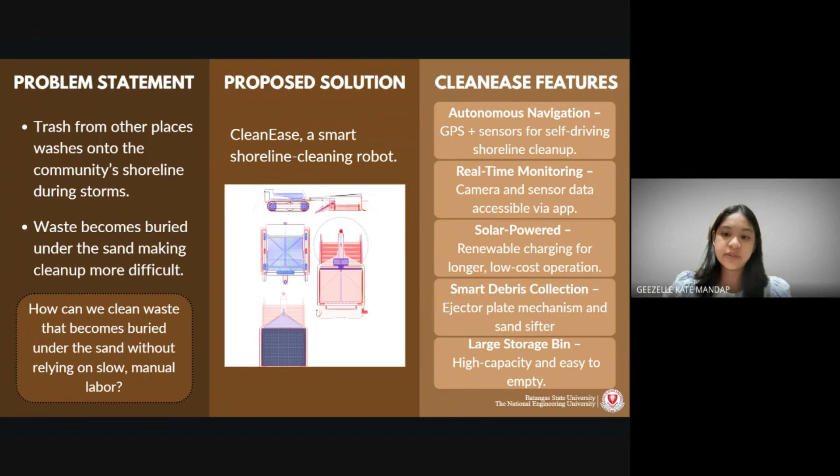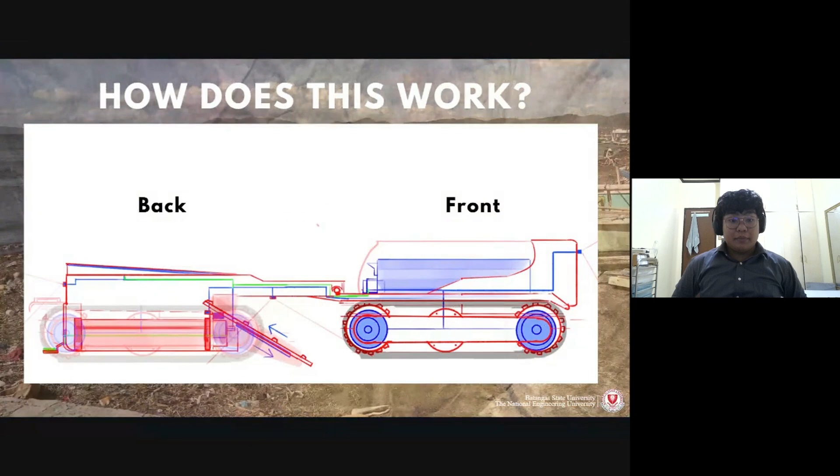Let us walk you through how our robot actually works with our low fidelity prototype. So first, imagine the robot moving along the shoreline with its tracks, similar to the ones found in construction vehicles. As it drives forward, its sensors and cameras continuously scan the sand to detect visible trash and even some partially buried waste on the surface. Once the robot identifies debris, it will automatically position itself so the angled sieve can scoop it up.

Now here's where the mechanism gets interesting. Equipped with an angled sieve behind it, the robot scoops up debris and repeatedly shakes it in a sifting motion, allowing sand to fall through while retaining the larger materials. The trash stays inside and is directed towards the waste hopper at the back, where everything the robot collects is stored. Inside the hopper, an actuator with an ejector plate is installed. This plate remains flush against the front wall of the waste hopper while the robot is still collecting.

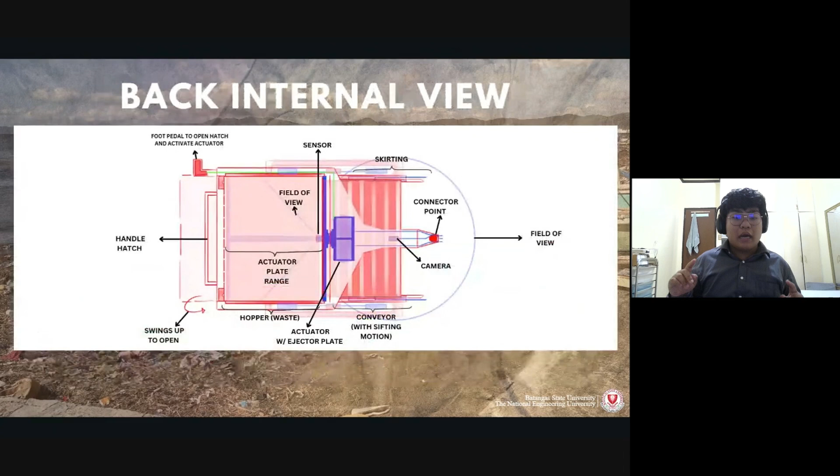Although the trash collection process is automated, the robot still requires an operator. When the hopper is full, a signal alerts the operator. The rear wall lifts, and the actuator, which is activated by a foot pedal located behind the robot, pushes the ejector plate forward, clearing all of the trash without manual scooping.

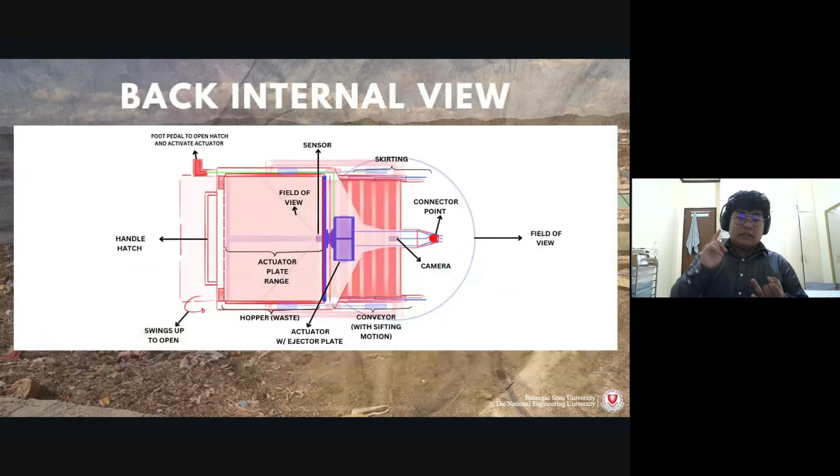All components, the drive motors, the sensors, the sifter, and actuator, are powered by the battery, which is supplemented by a solar panel to extend its operating time. The robot's microcontroller coordinates all functions. This includes detecting trash, moving the wheels, operating the sifter, and controlling the ejector plate.

In short, the robot moves, detects, collects, stores, and unloads all on its own with just a little responsibility needed from a human. And although our prototype is digital for now, the mechanisms and system flow are designed to function in a real world shoreline environment.

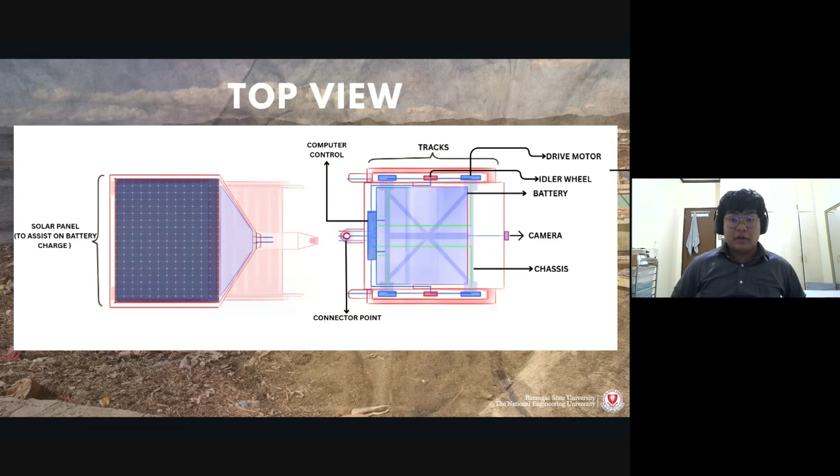So for our financials and metrics, we kept everything simple and realistic since we are still in the simulation stage. Right now, the estimated cost of building CleanEase mainly comes from the basic materials like the sensors, motors, batteries, and frame. Maintenance is also very minimal because it mostly involves recharging and replacing small parts when needed.

For the metrics, we gathered realistic targets based on what similar small robots can achieve. CleanEase is expected to collect around 1 to 2 kilos of trash per hour, detect about 60 to 70% of buried debris, and cover around 100 to 200 meters in one run, which already reduces a big chunk of manual work, around 40 to 60% less labor needed.

And as we continue improving the design, we expect costs to go down and the robot to become more efficient, especially once we refine the sensors and collection mechanism.

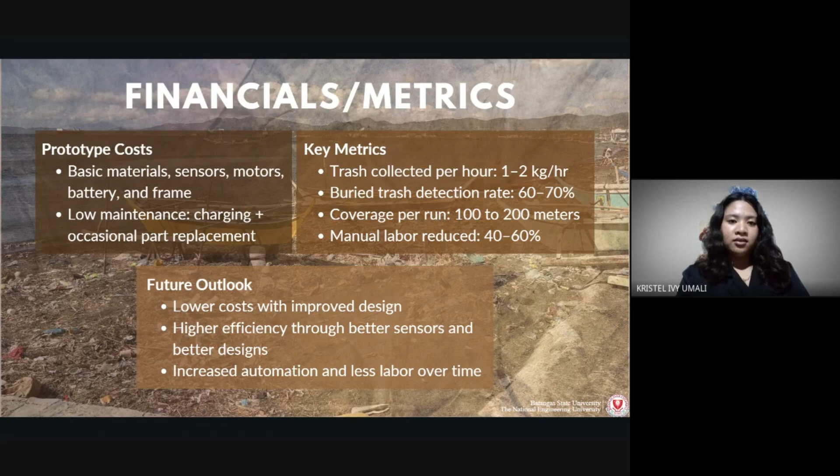Now, what then? So at this stage, we have validated the problem through interviews with the community, and we now have a clear concept of our robot. We have created detailed sketches that show how CleanEase will move, detect trash, and scoop out both surface and buried waste. Our next step is to turn this sketch concept into a working prototype.

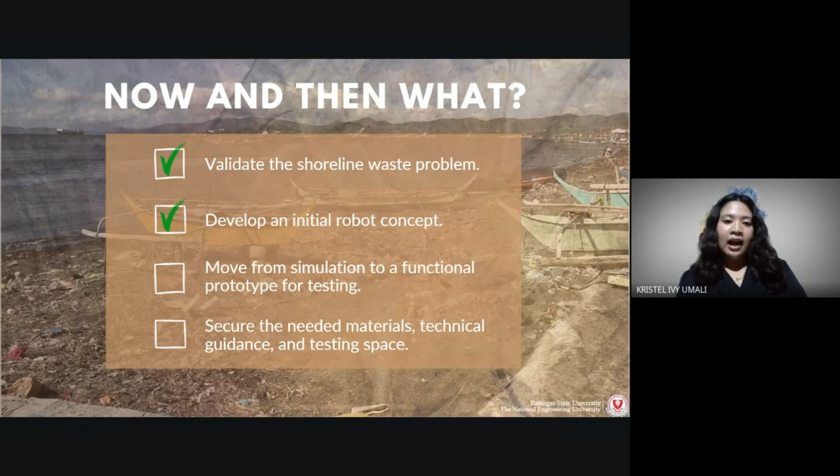To make that happen, we will need materials, technical guidance, and a space where we can test the robot in conditions similar to a shoreline. Basically, we are ready to move from ideas and sketches into actual building so we can finally see how CleanEase performs in real world conditions.

For the beneficiaries, CleanEase creates impact on several levels. First, it directly helps our coastal communities. These are the people who struggle every day with waste washing onto their shorelines. With CleanEase, cleaning becomes easier, faster, and less tiring. And this matters most during rainy season when trash builds up the fastest and overwhelms local efforts.

Second, CleanEase benefits our marine ecosystem by removing trash before it breaks down into microplastics or gets buried deeper. We protect marine life and prevent long-term environmental damage. Every piece of waste removed is one less threat to biodiversity.

Third, local government units and environmental organizations also benefit. CleanEase supports their regular cleanup operations, giving them a practical tool to maintain cleaner coastlines. Instead of relying only on manpower and seasonal drives, they now have technology that strengthens their program.

And overall, our project supports four major sustainable development goals. It aligns with SDG 9, industry, innovation, and infrastructure, because CleanEase is an innovative engineering solution to a community problem. With SDG 12 as well, by promoting proper waste management and reducing environmental impact. SDG 14, by protecting marine habitats from accumulated trash, and SDG 17, since collaboration with communities, LGUs, and environmental groups is essential in testing and implementing CleanEase.

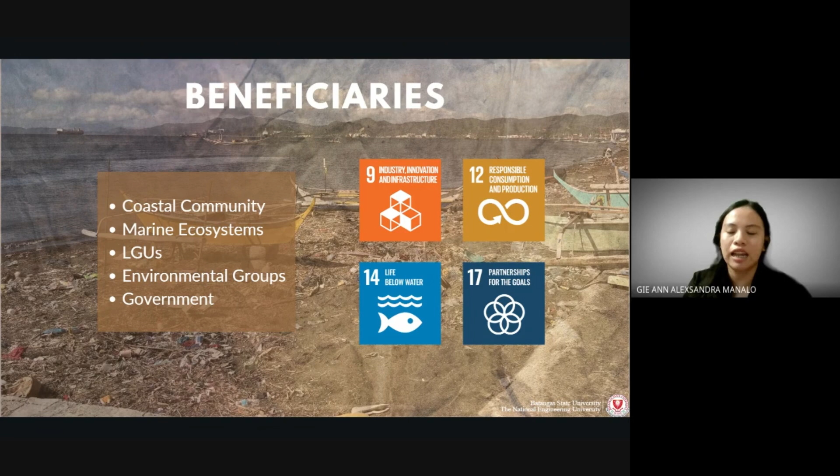As we reach the end of our presentation, we just want to leave you with one thought. Our shorelines matter. They're part of our everyday lives. A place where families gather, where fishermen work, where tourists explore, and where our communities connect with nature.

CleanEase may be a prototype today, but it represents something bigger. It represents possibility. Every mechanism and every decision behind this robot was built with one question in mind. How can we help our coastal communities in a smarter, more sustainable way? So today, we're not just showing you a prototype, we're sharing a vision.

Thank you very much for listening. With your guidance and feedback, this simulation can evolve into a real life working machine.